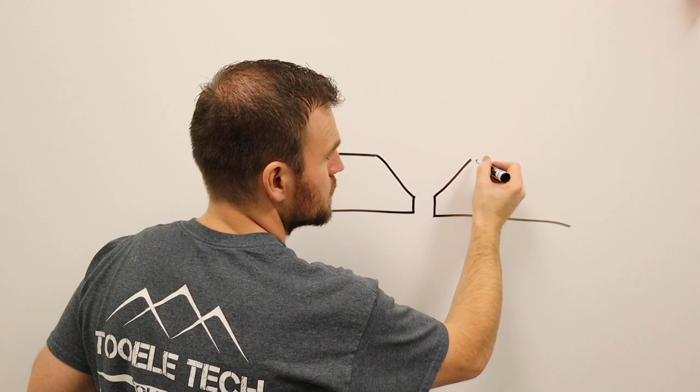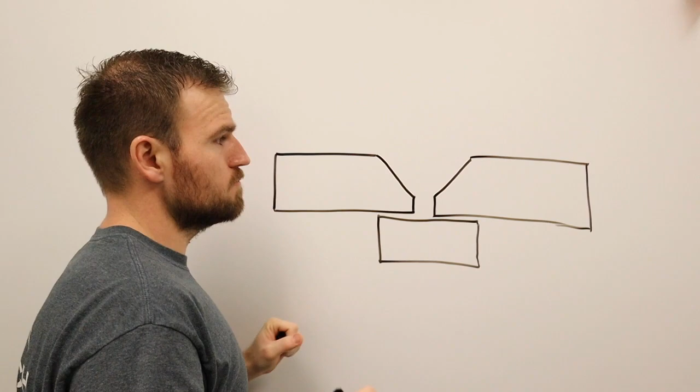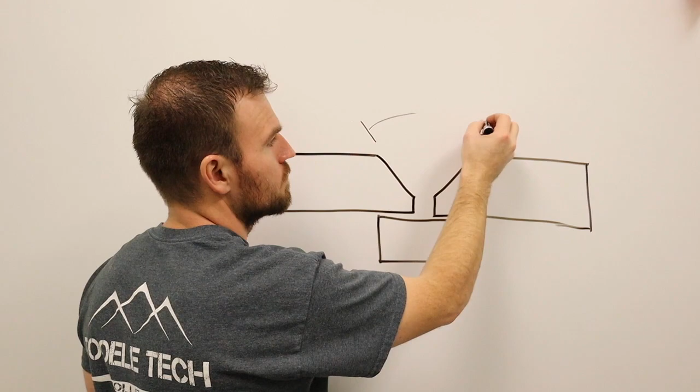Now, believe it or not, all of these things have names and some criteria that have to be met. The first thing is the angle that goes from this bevel side all the way over here to this bevel side. We'll go ahead and draw it like this. This is called the included angle or groove angle. So, included groove angle. On ours, we're going to probably use a 60-degree angle for most of these.

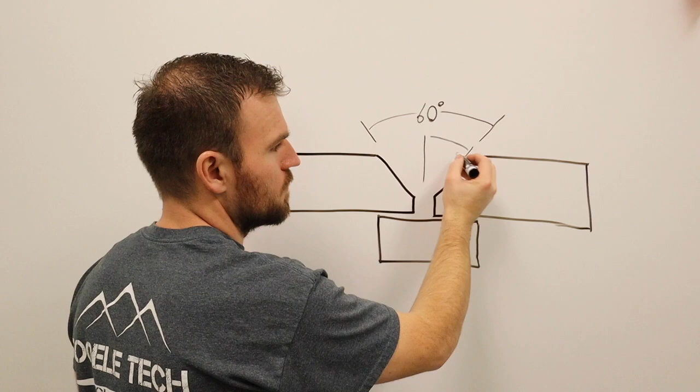That means that from one side, if we went to the center and drew ourselves another line over here, this would be 30 degrees. Now, this bevel could be opened up a lot bigger, or it could be a lot smaller. It's all in what they've designed on those joints. Like I said, 60 degrees is kind of the most popular or common size out there, so it's what we're going to be welding.

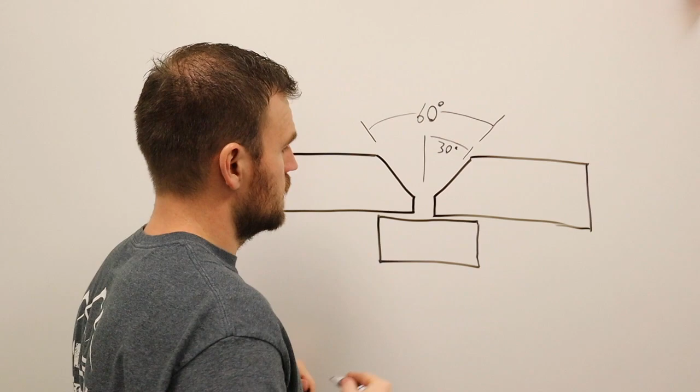Now, the next thing that we have is our root opening, and this will be the distance from this plate over to this plate. Now I do want to explain one thing first, and that is called the root face. Let's say this flat side right here, or this flat side right here, would be considered the root face. So I'm just going to draw an arrow. We'll call this one the root face.

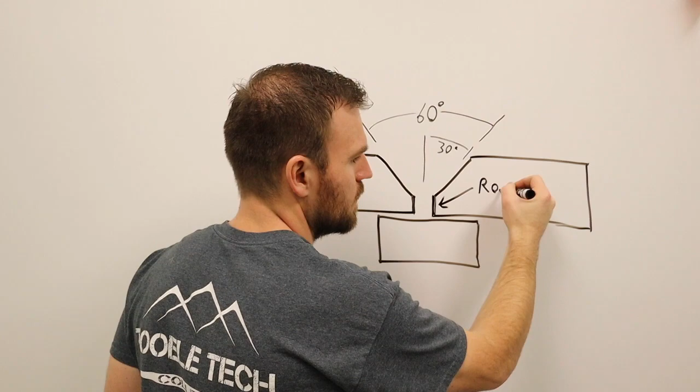Now, that root face can be big, it can be small. Ours will typically actually be brought down to a nice edge. That bevel will go all the way down. But I wanted to show you what a root face looks like. So we will have no root face on our welds or our plates.

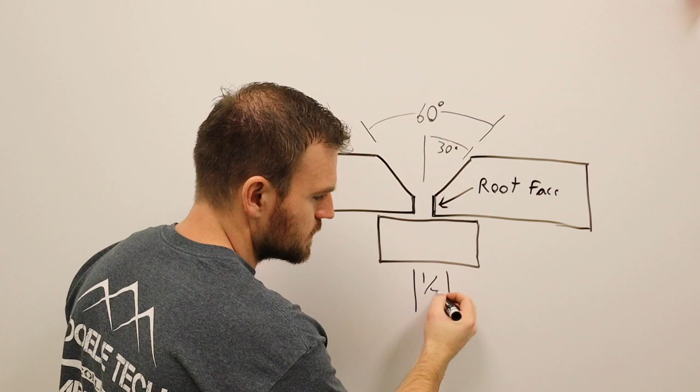Now the distance from this root face to this root face is called the root opening, and that will be measured from one side to the other. We're going to do about a 1/4 inch for all of our plates, so I'm just going to put a 1/4 inch. Again, some people like an 1/8 inch here, some people like bigger, some like smaller. Sometimes you have to do a bigger one, but this is our root opening from here to here.

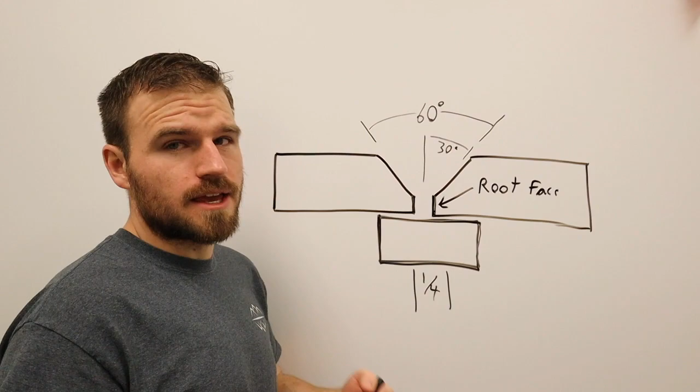Now, this block right here is going to be our backing strip. The backing strip will run the whole length of our V-groove. Some V-grooves are what they call an open root. What they do is take something like a 6010, which is a fast freeze electrode, and actually weld that opening closed. These are for things like pressure vessels and such. We're going to stick to more of a structural steel design when we're doing our welds, so we're going to use a backing strip.

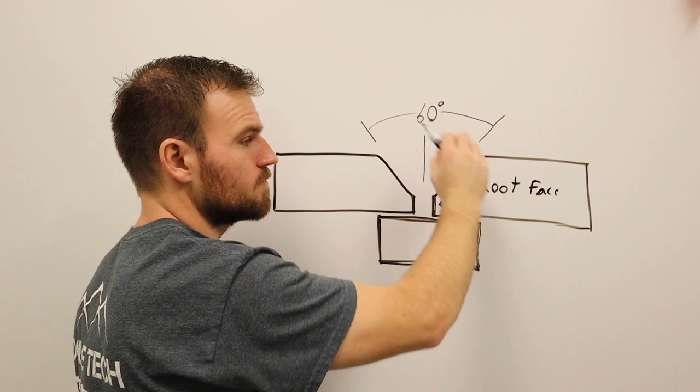That means you're going to actually be laying metal onto that backing strip and bouncing back and forth on that root. So again, we have our groove angle here, our root face, and our root opening from here to here. I'll go ahead and write root opening, or root gap, I should say, I'm sorry. Gap.

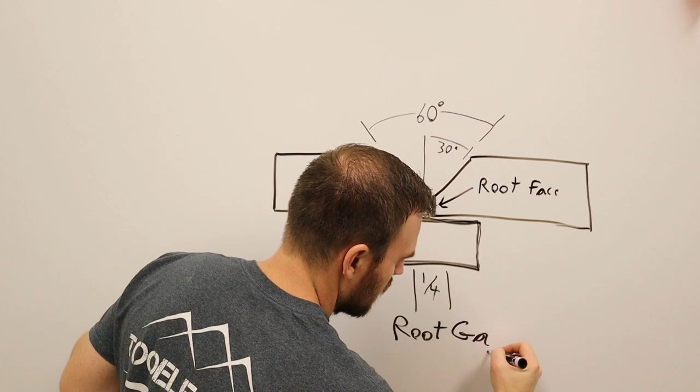Okay, so now we kind of know everything we need to know about the design aspects of a V-groove. I'm going to go ahead and draw up some symbols for you guys, that way you can see what those look like. Let me clean this off and let's start talking about that.

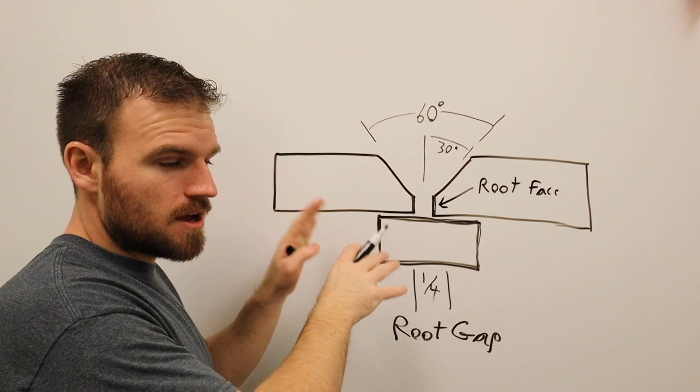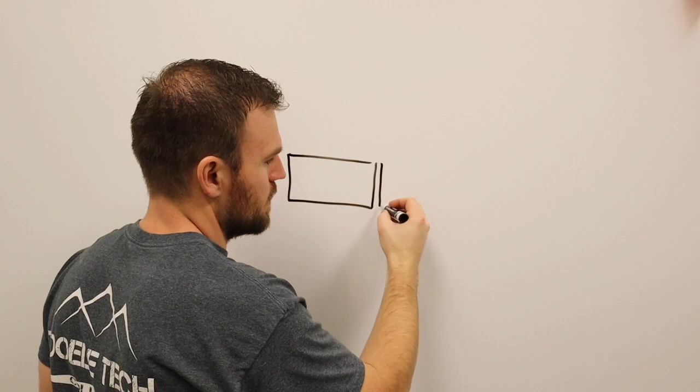All right, so let's say we have two plates that are going to need a butt weld. So we got one plate here and we have another plate right next to it. Now the weld symbol, we're going to continue using the same type of weld symbols we've been using. It's just going to be an arrow that's going to point down to where we want that weld to be placed, and then we're going to have our reference line coming off of it.

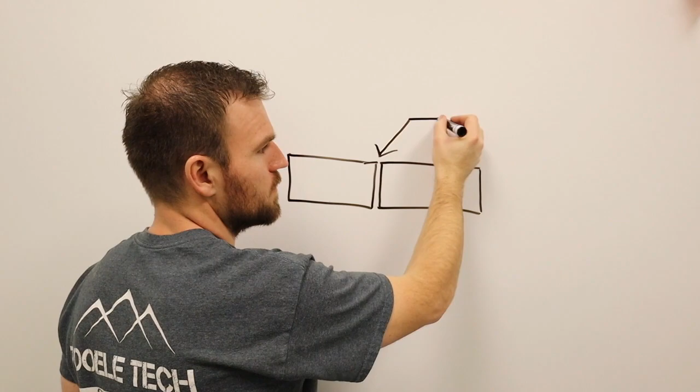Now, a V-groove, if you haven't noticed like with the fillet welds, the actual weld symbol looks like the weld, sort of. So we're going to do a V-groove, so that means our symbol is going to be a V. Now notice I put that on the arrow side.

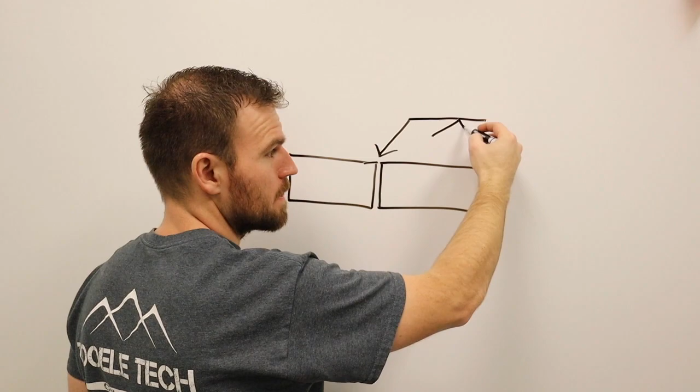That means I want this bevel to be put on this side of the plate. I don't want it to be put on the back side. So if I was to draw out what the bevel would look like, it would be something more along the lines of this. Oops, I'm a little big with that one.

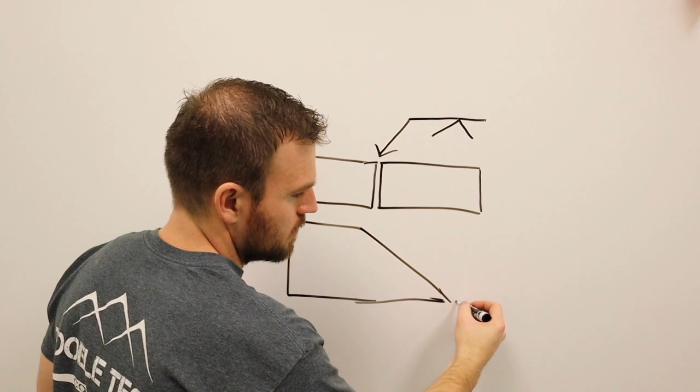All right, so now if I was going to start putting in some more of my specifics here, I would go ahead and throw in a backing strip. It's just going to look like a block right here. So we're going to go ahead and put the backing strip in there.

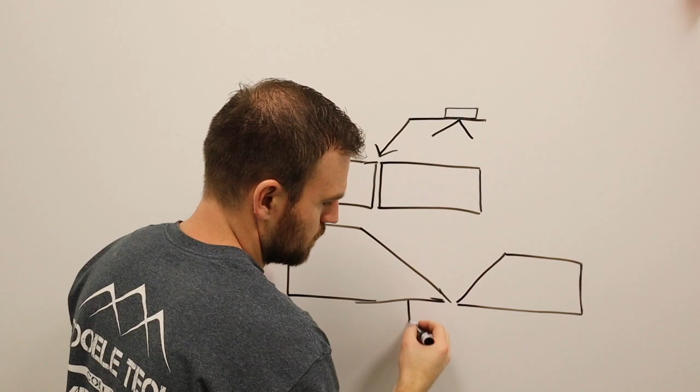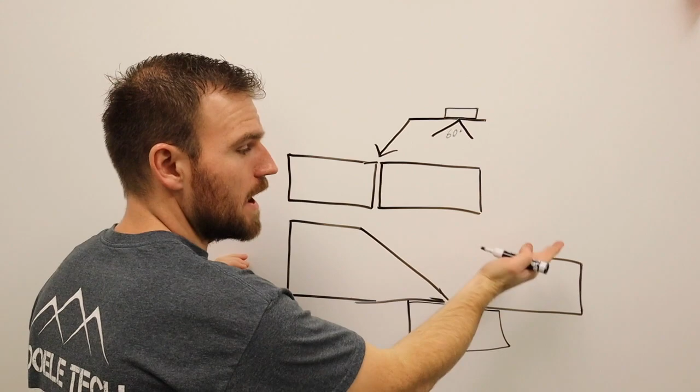And then I would also put my 60 degrees groove angle, can't really totally see that. So from here all the way over to here will be that 60 degrees, and it will always be placed right about there. Now, because we have a root opening, what I'm going to do is actually move this 60 degrees down to about right here.

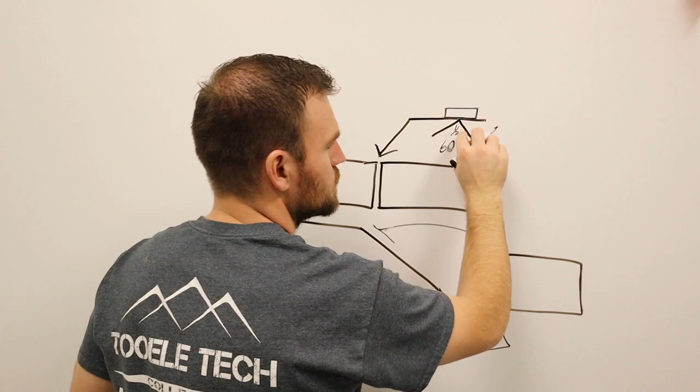And I'm going to put a 1/4 right here, or that was a 2 — I'm going to put a 1/4 right there. So now my root opening is going to be the first thing inside that V-groove, and then I'm going to have my 60-degree groove angle.

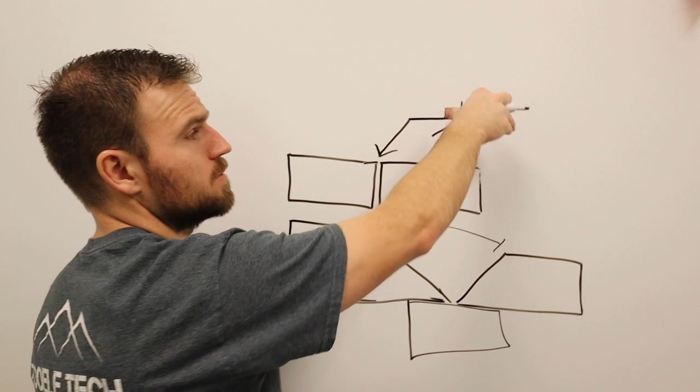Now there are some other little things we could add on to here. This backing plate could be drawn as a backing weld — they call it a backing weld — so it would be a little dome on there if it was a backing weld. What that would mean is you're actually going to do an open root weld, and then you're going to come in and cut it out, and weld it from the back side.

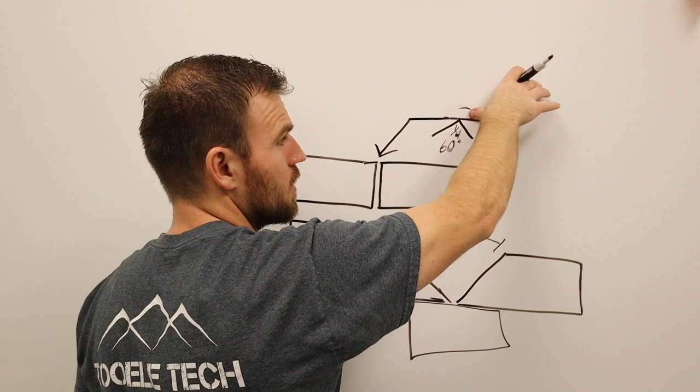We won't be doing any of that. That's not super popular, even in pressure vessels. That would be kind of for some serious boiler-making type stuff. We're going to be mostly doing our backing strip, so we got that.

We may even give, if we had our notes in here, we might put in our notes what size that backing strip is.

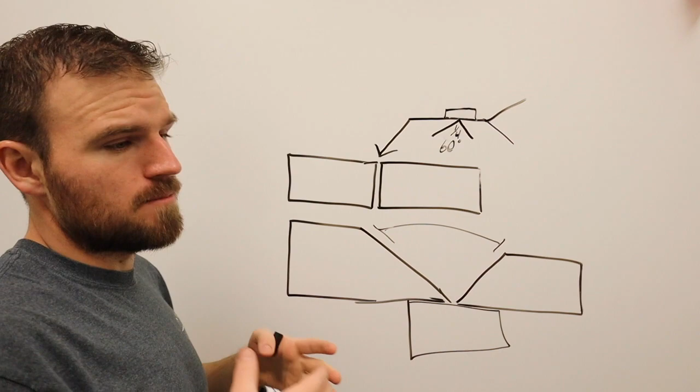Now, if we had a bevel that we need to do, but we didn't want it to go all the way through the plate — say we only wanted it to go in about halfway — so if it looked something more like this, how would we draw that out? Let me go ahead and erase this.

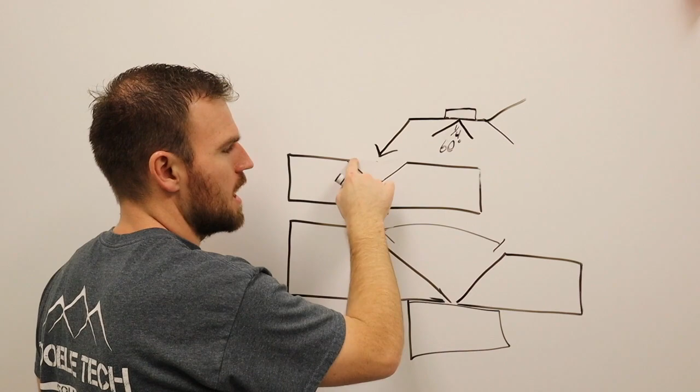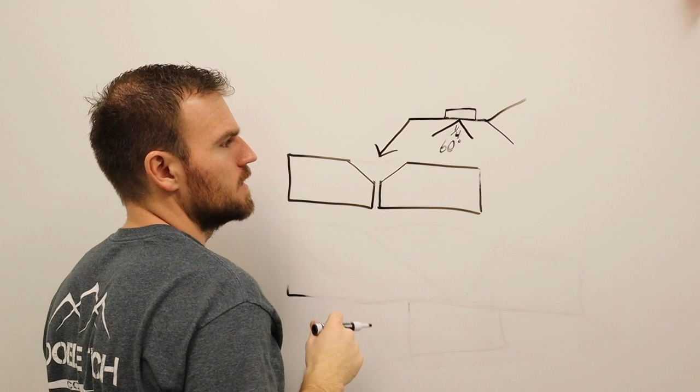What we would do is write these numbers over here. The first number is going to be how deep we wanted that bevel to be. So I would say we'll do like a 3/8. So we'll have a 3/8 over there, and that's telling us how deep that bevel is going to be.

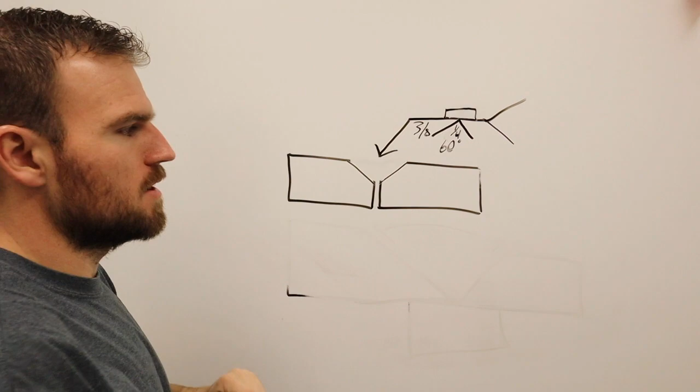Hopefully this plate over here will be at least a 1/2 inch, if not more, to get that weld size in there. But as far as what we're doing, this is it. Now you can add and do some different styles of bevels, you can do all sorts of stuff, but for just a basic V-groove, these are all the symbols you're going to need to know, and these will be all the ones that we test on.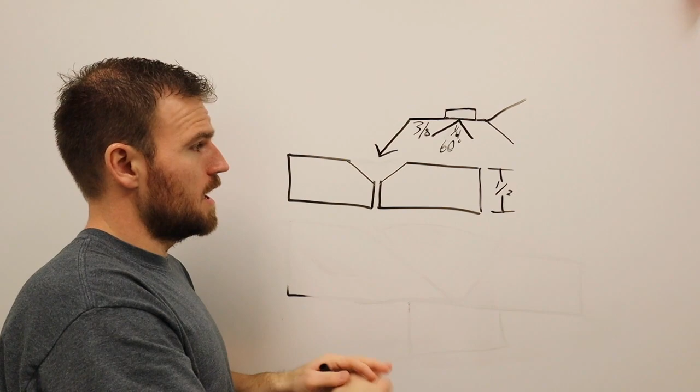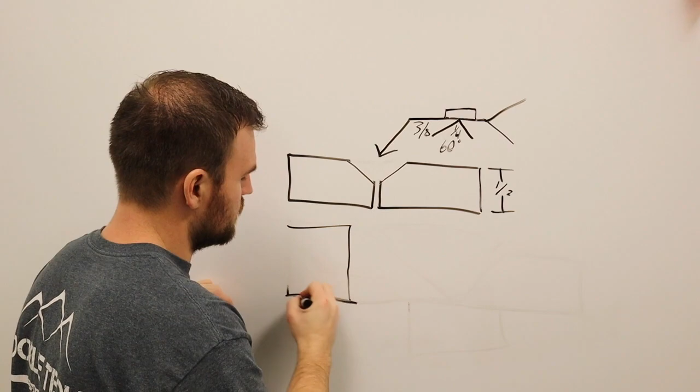I'm going to go ahead and link below another set of just welding symbols. I want you to go through and look at all the different bevel designs they have. They've got flat-sided V-grooves — that's where one side of our V-groove is actually flat. This is very popular, just because of how joints kind of work out sometimes.